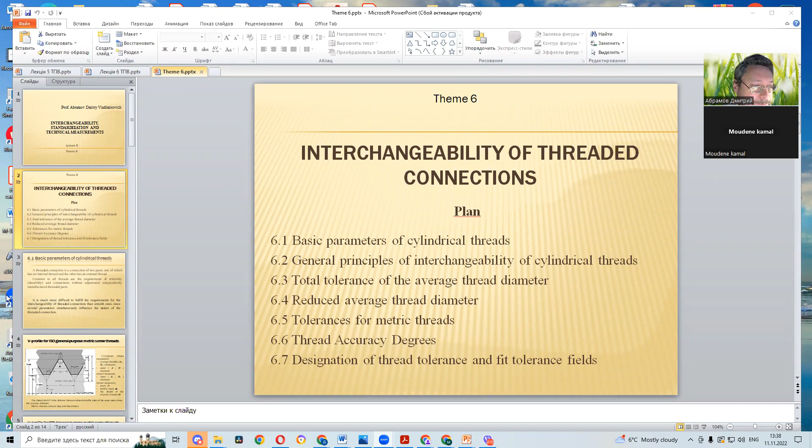Please tell me when you finished this slide. Yes, okay teacher, next slide. Yes, our 6.1 item, basic parameters of cylindrical threads.

A threaded connection is a connection of two parts, one of which has an internal thread and the other has an external thread. Please write down to your notes.

Common to all threads are the requirements of reliability and connection without adjustment of independently manufactured threaded parts. It is much more difficult to fulfill the requirements for the interchangeability of thread connections than smooth ones, since several parameters simultaneously influence the nature of the threaded connection.

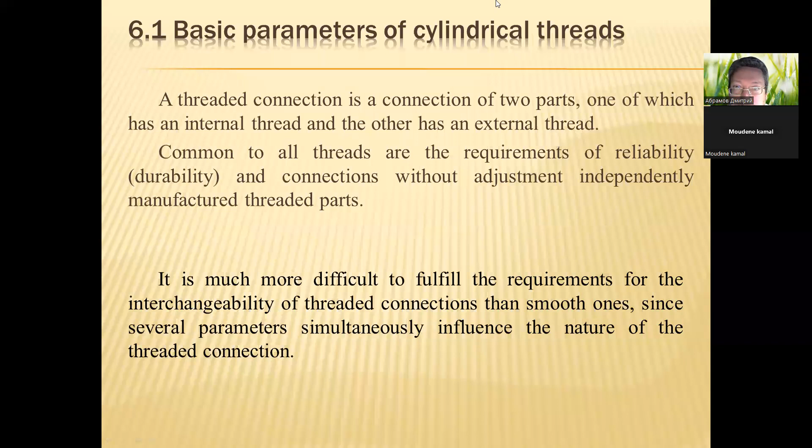Now you can see the V profile for ISO general purpose metric screw threads. Cylindrical thread parameters.

Average or middle diameter, D with suffix 2. This line is the average or middle diameter.

Outer diameter, D without suffix, small d or big D. Small d is used for the bolt and big D is used for the nut. Nut has the internal thread and bolt has the external thread. External thread is the bolt, internal thread is the nut. So outer diameter is D without suffix: big D or small d. Big D is used for the internal thread and small d is used for the external thread, for the bolt.

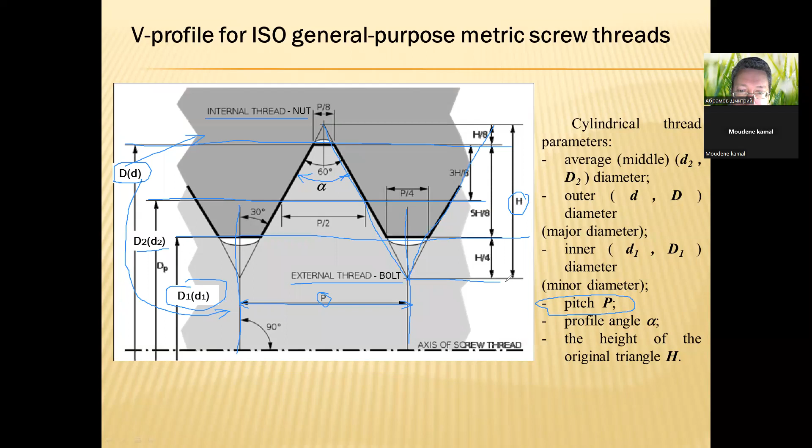That's all the parameters of the metric screw threads. Please write down to your notes this figure with diameters - outer, inner, and average or middle diameter - with the pitch and H, the height of the original triangle, and with the profile angle that is equal to 60 degrees.

Okay, the thread pitch P - previous slide please. The thread pitch P, this distance, these dimensions - the thread pitch P is the distance between adjacent profile sides of the same name along the average diameter or middle diameter.

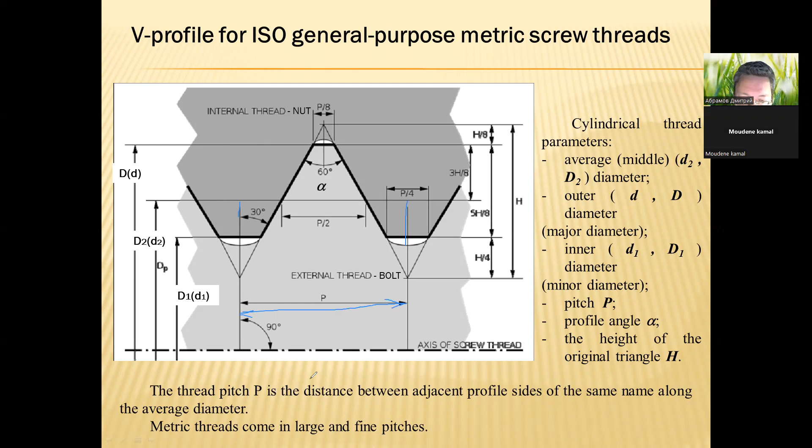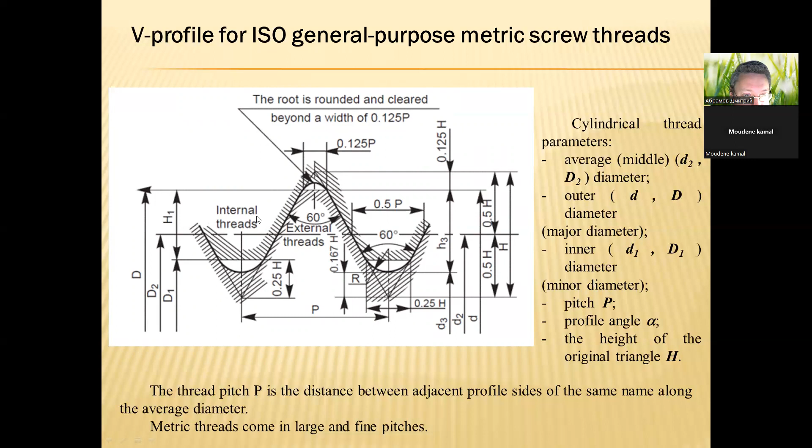Metric threads come in large and fine pitches. One more figure with metric thread.

Metric threads come in large and fine pitches. For a thread with a large pitch, there is a dependence: D is equal to 6P powered in 1.3. For threads with fine pitch, different pitches can correspond to the same outer diameter.

What we can see in this picture, in this figure? We can see the pitch diameter or middle diameter, we can see the pitch and the diameter, and the angle. So the angle is 60 degrees for metric threads.

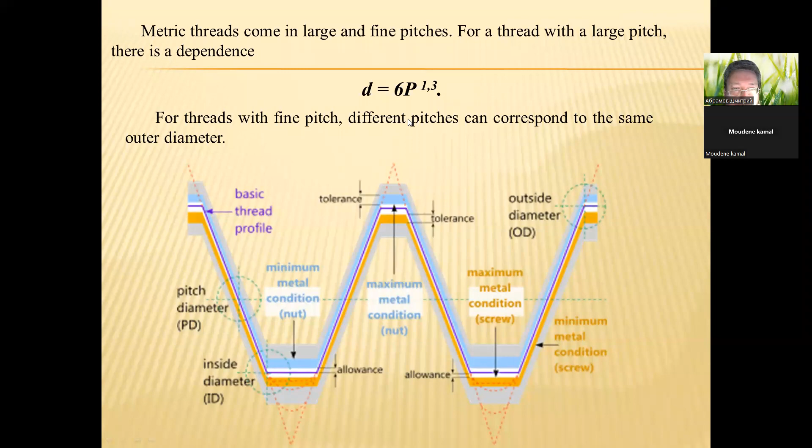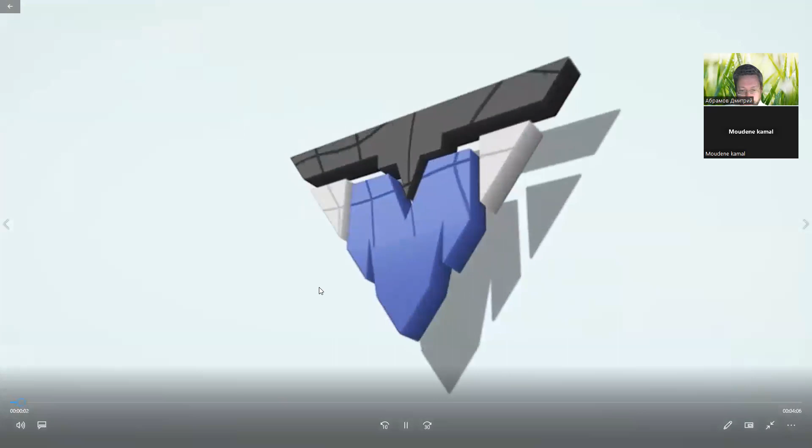Now I want to show you some videos with thread connections. It's thread anatomy. What types of thread we can use, we can see.

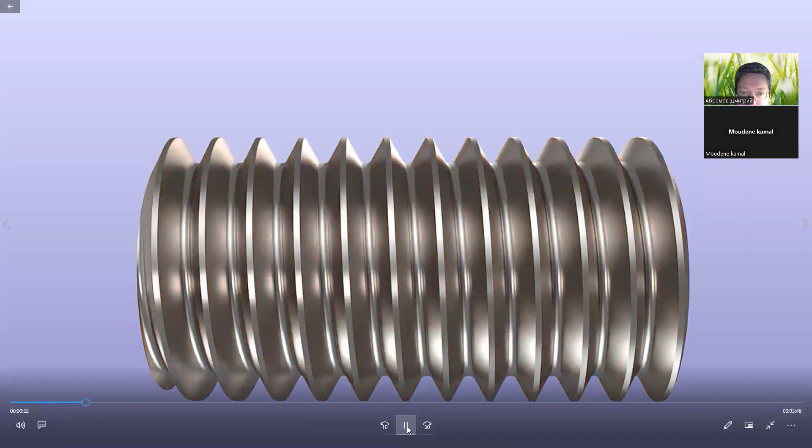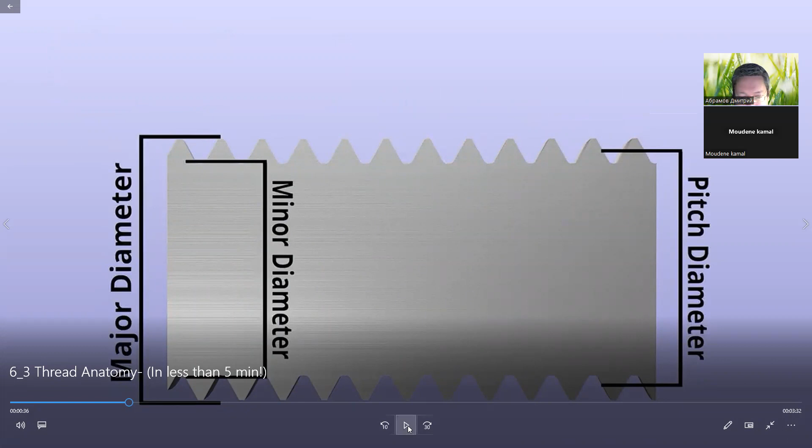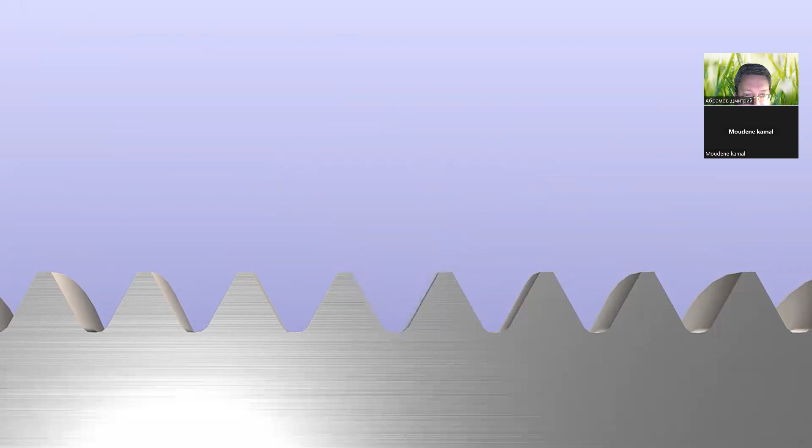We have major diameter or outer diameter, minor diameter or inner diameter, and pitch diameter or middle diameter of the thread. It's external thread of the bolt, and it's a pitch, thread angle, thread depth.

Types of thread. We can see 9 types of thread. Metric, it's the most popular type of thread, metric thread. Inch, Whitworth, Acme, modified square, buttress, sharp V, worm, and knuckle.

Metric thread. The ISO metric standard screw thread has a 60-degree pitch angle, with a flat crest and a rounded root. Uses pitch to define thread.

Example, M8x1.25 is equal 1.25 millimeters from root to root. It's a pitch of the thread. 1.25, it's from root to root. And this type of thread, general use for standard assemblies that need to be bolted together.

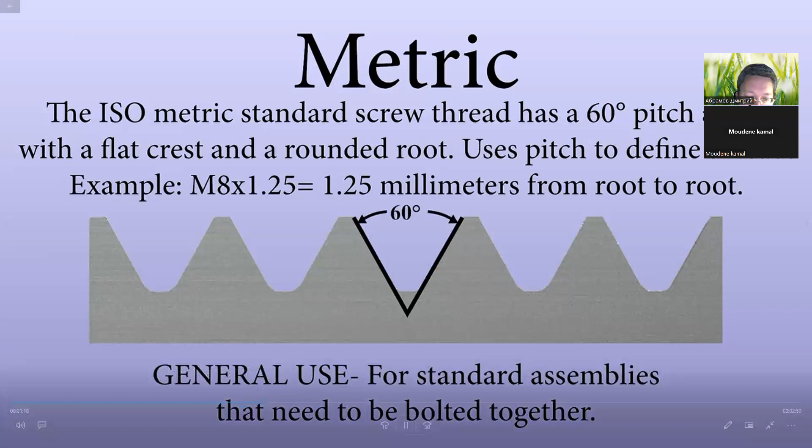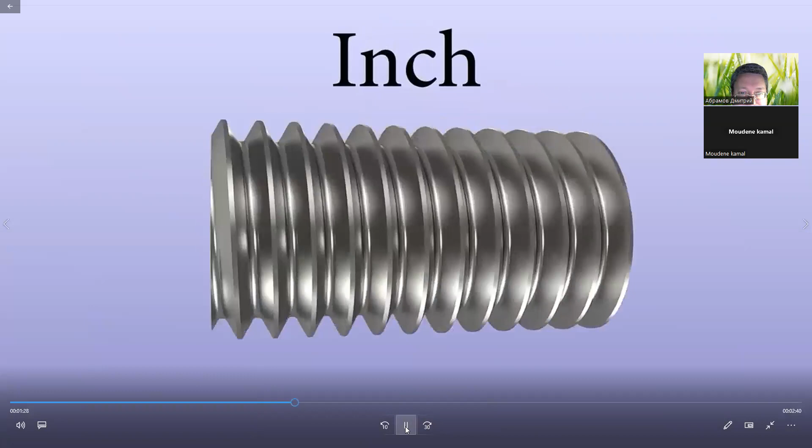Next type of thread, inch. Has a thread angle of 60 degrees with a flat crest and a rounded root.

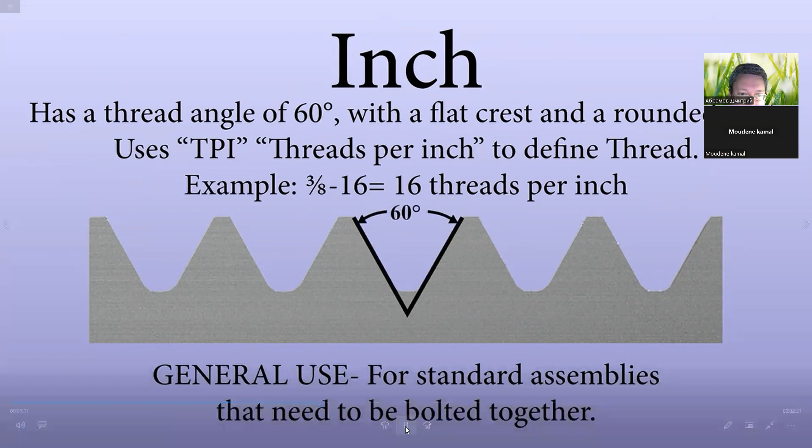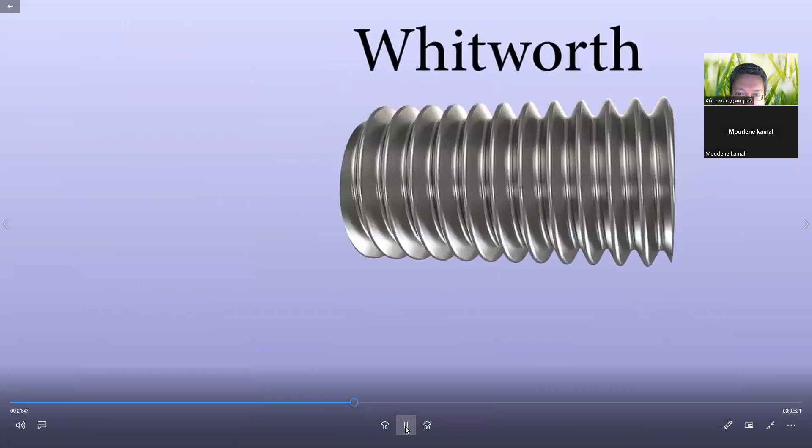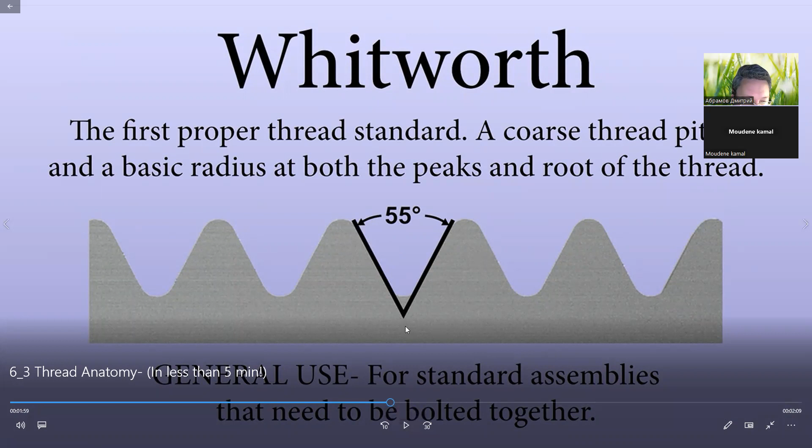Whitworth. The first proper thread standard, coarse thread pitch and basic radius at both the peaks and root of the thread. And what we can see, the angle, it's equal 55 degrees. And the general use for standard assemblies that need to be bolted together.

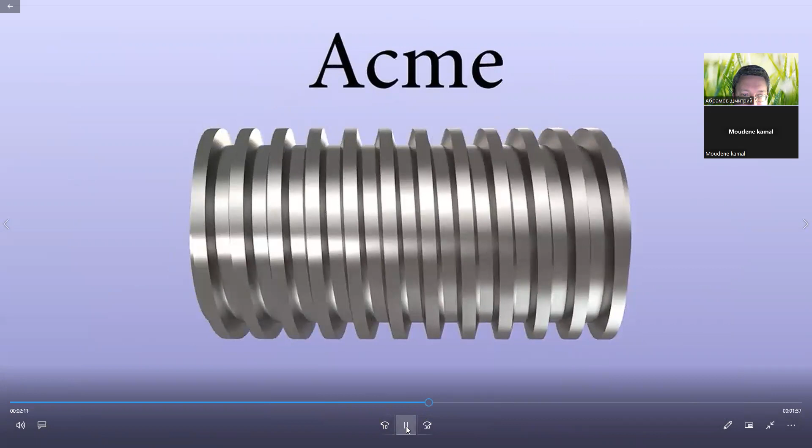Next type, Acme. Trapezoidal thread form with a flat crest and root. These threads are one of the strongest symmetric thread profiles. General use for controlled movements on machine tools, testing machines, jacks, aircraft flaps, and conveyors.

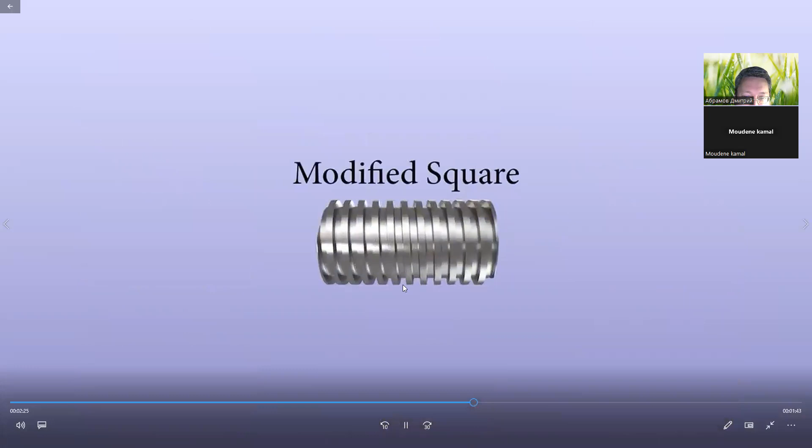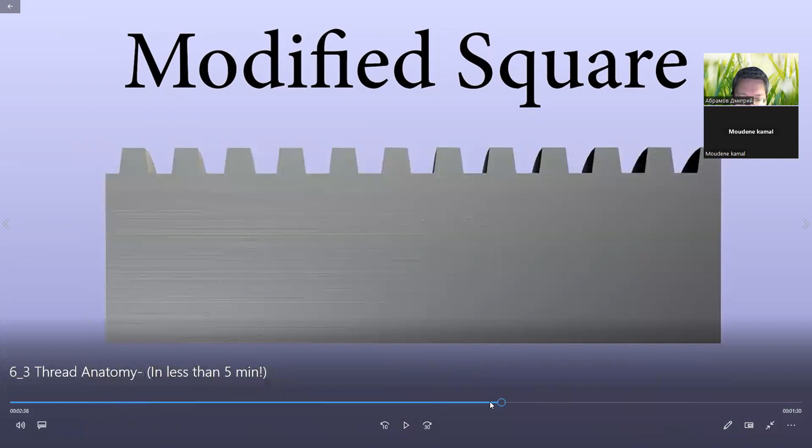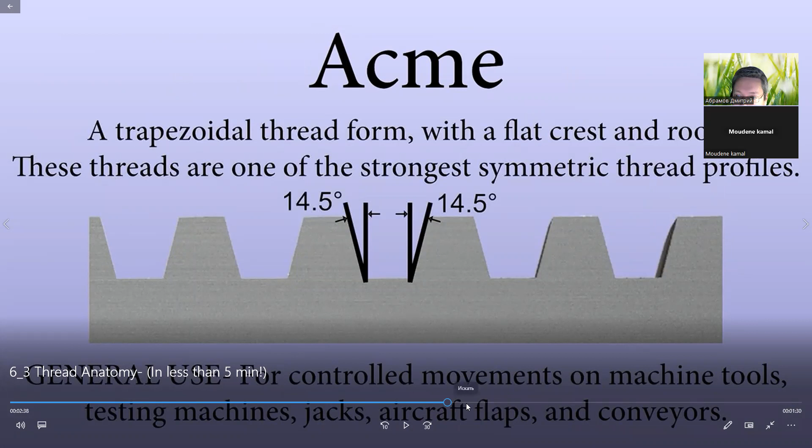Modified square. Similar to the Acme thread, the modified square thread has a trapezoidal profile, but with a much smaller pitch angle than an Acme thread. It's 5 degrees. In Acme thread, it's 14.5 degrees. So that is the difference between these two threads. Modified square has the angle of 5 degrees.

Where is this modified square used? General use: since the pitch angle is small, it has low friction and high transmission efficiency.

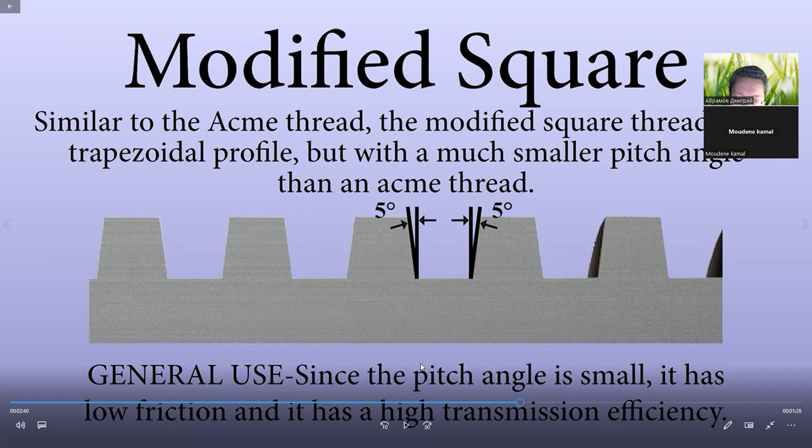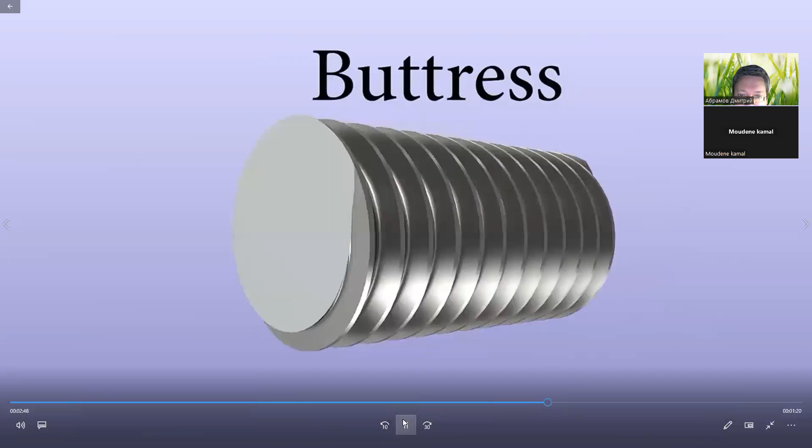Buttress. Threads with an asymmetrical pitch. All previous types of threads were symmetrical, having a symmetrical pitch. Now this type of thread has asymmetrical pitch. General use: high loads and heavy lifting, transmission threads in turning and milling machines.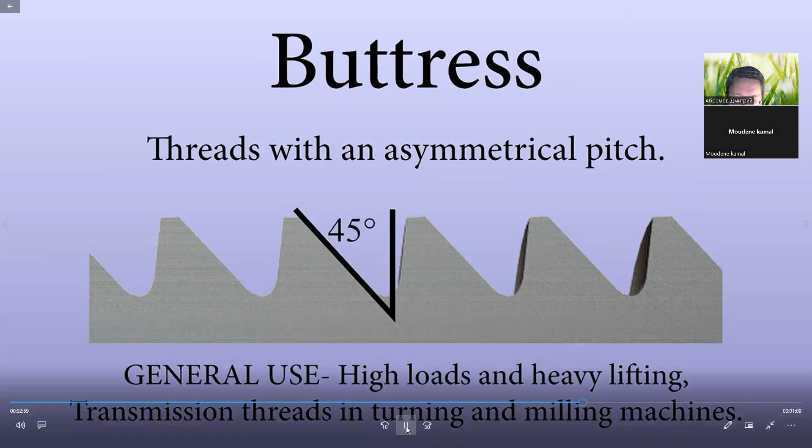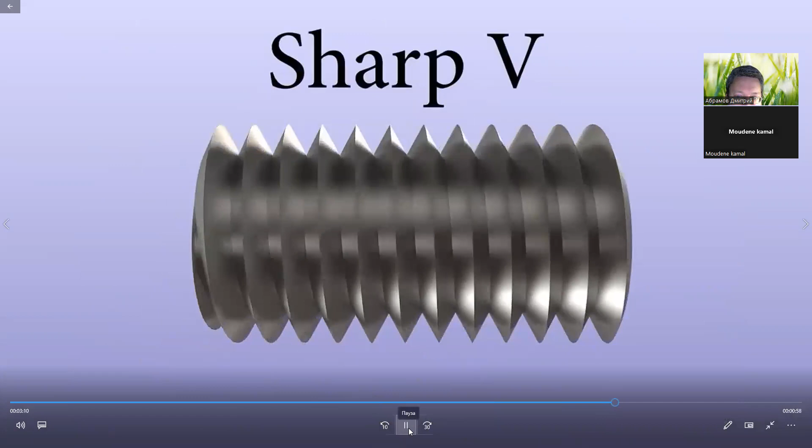Sharp V. Peaks and roots are sharp. This allows for the same cutting tools to be used for all pitches. General use: meant for locomotive work because it naturally forms a steam tight joint when machined correctly.

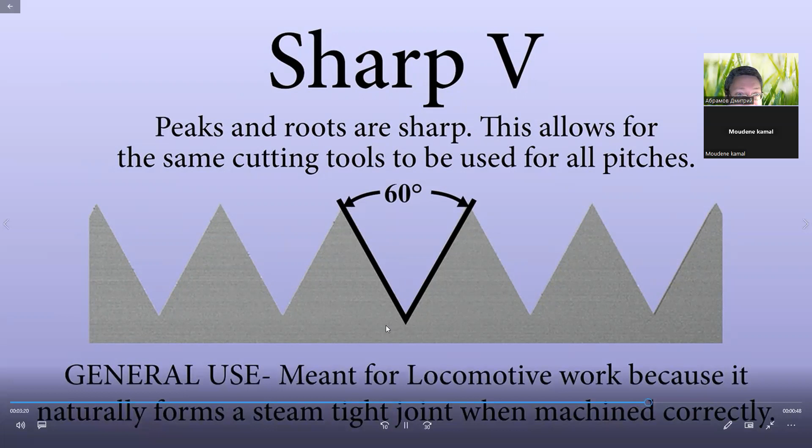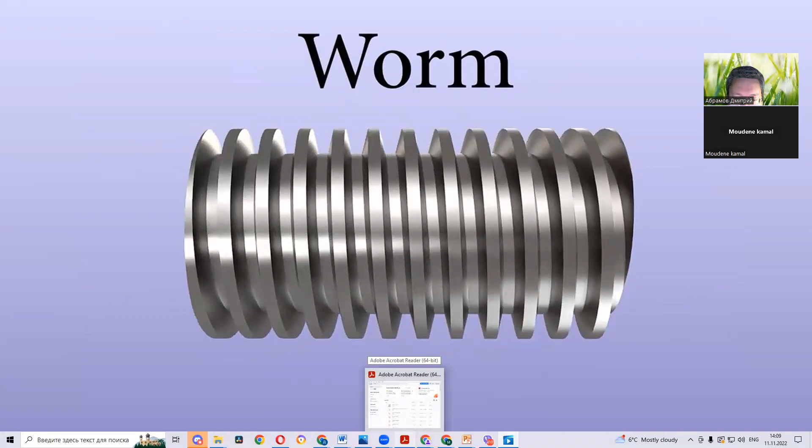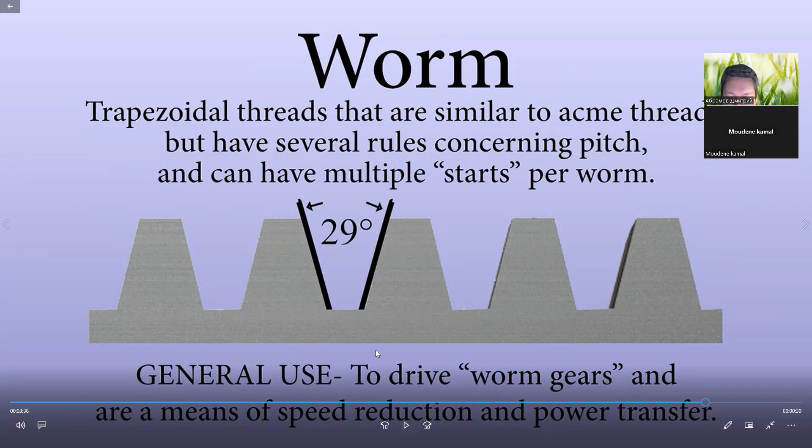Worm. Trapezoidal threads that are similar to Acme threads but have several rules concerning pitch and can have multiple starts per worm. The angle is equal 29 degrees. General use: to drive worm gears as a means of speed reduction and power transfer.

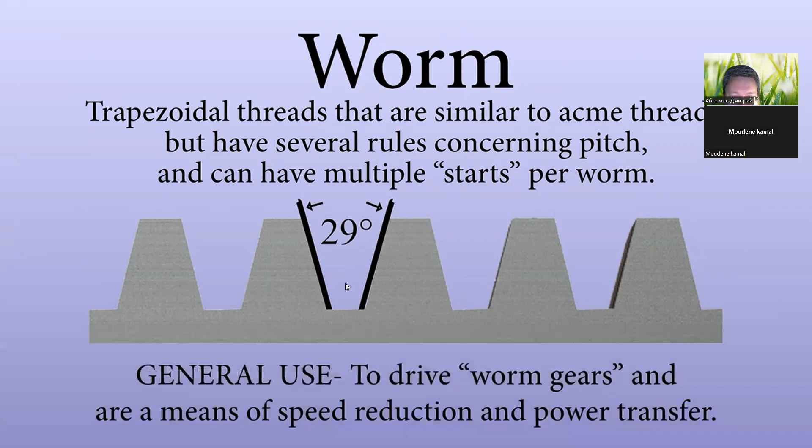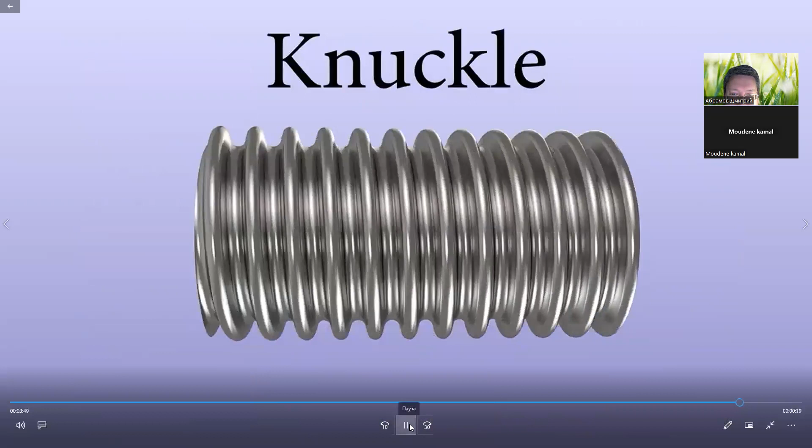And the last type of thread is knuckle. Consists of a highly rounded thread form. These threads are highly resistant to debris and wear since there are no sharp edges for anything to catch on. General use: desirable for high load operations where debris can be an issue, such as mining, locomotive, and industrial applications.

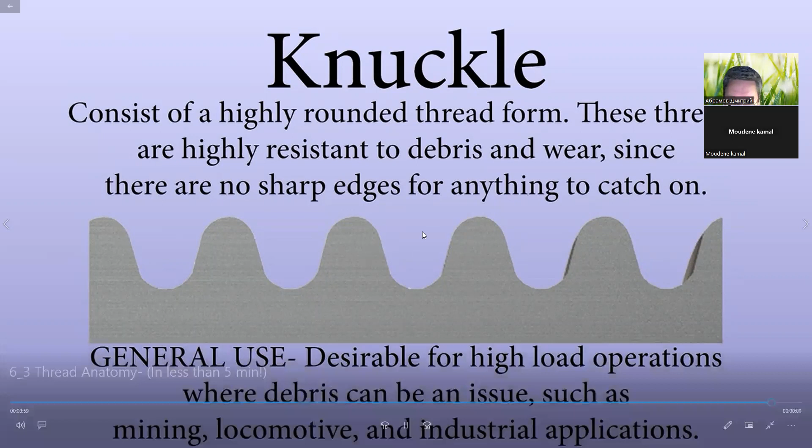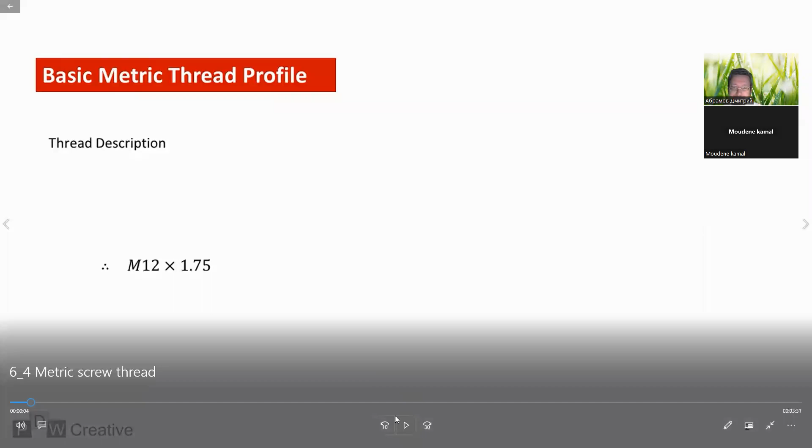Next video. Basic metric thread profile. It's a video about metric threads, the most popular thread in manufacturing.

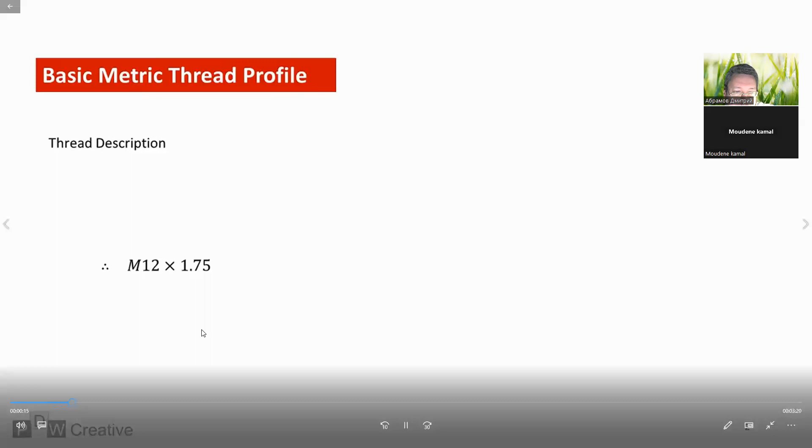Metric thread profiles are often written as shown. This is an example of a 12 mm thread, where M stands for metric, 12 describes the major diameter of the thread, and 1.75 is the pitch.

There are additional classifications sometimes written after the pitch, such as tolerance, but there is a lot to explain on this, so I'm going to go into that in another video.

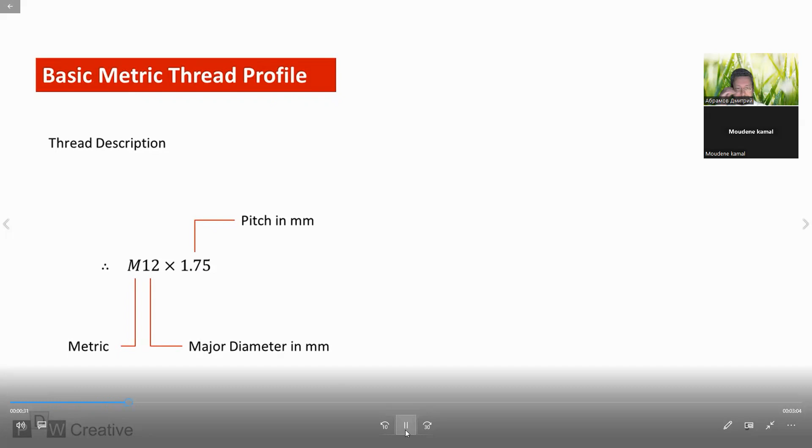The important part to know is that the major diameter refers to the largest diameter of the external thread, meaning the screw or bolt, and the pitch, P, is the distance between one tooth section focal point and the next corresponding point on the next tooth.

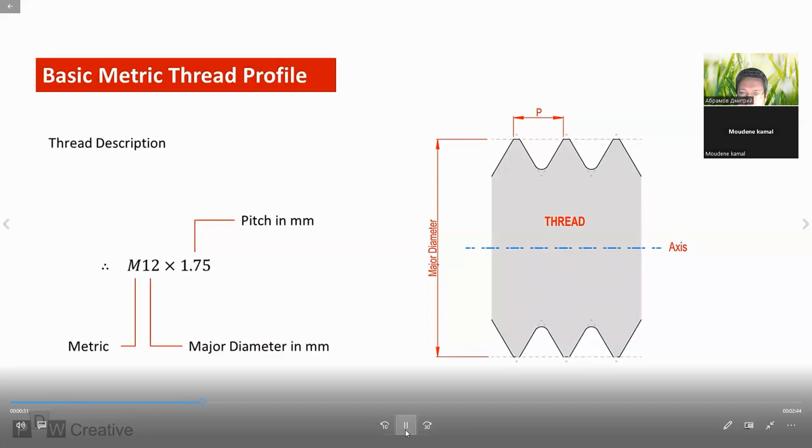International standards such as ASME B1.13M detail widely accepted thread diameter and pitch combinations. Here, I'm showing some of the most common coarse and fine type pitches for major thread diameters up to 36 millimeters.

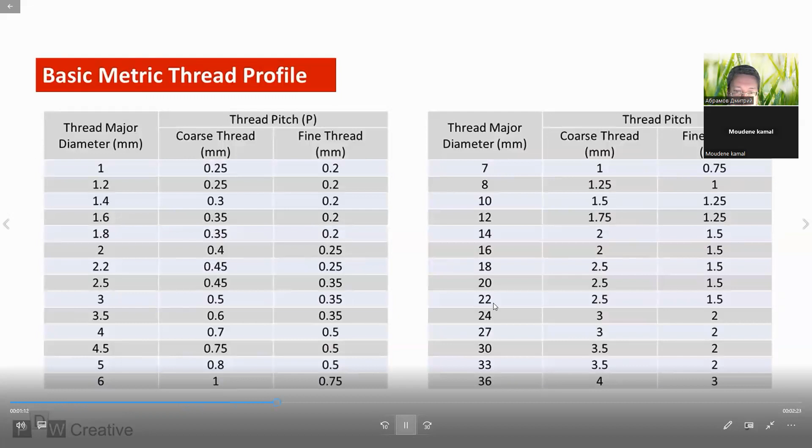The thread consists of an internal and external component. The internal part is the nut, and the external is the screw or bolt.

The major diameter or radius, for the benefit of this cross-section, is the largest thread diameter or radius. It is often also known as the crest of the thread. The pitch radius is the effective radius. The minor radius is the smallest radius and often describes the root of the thread.

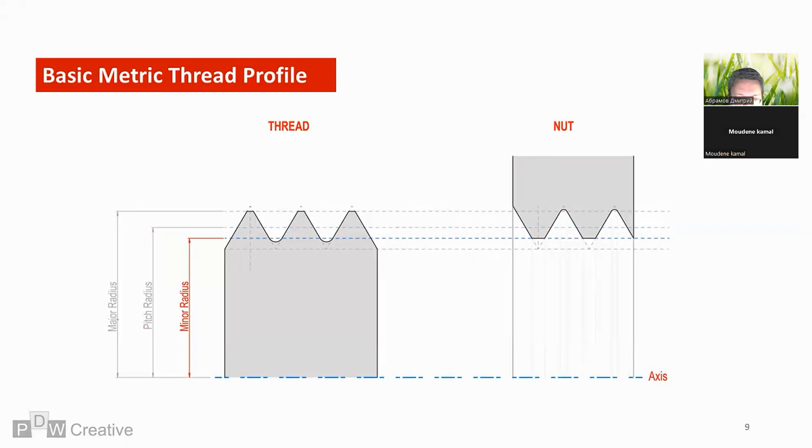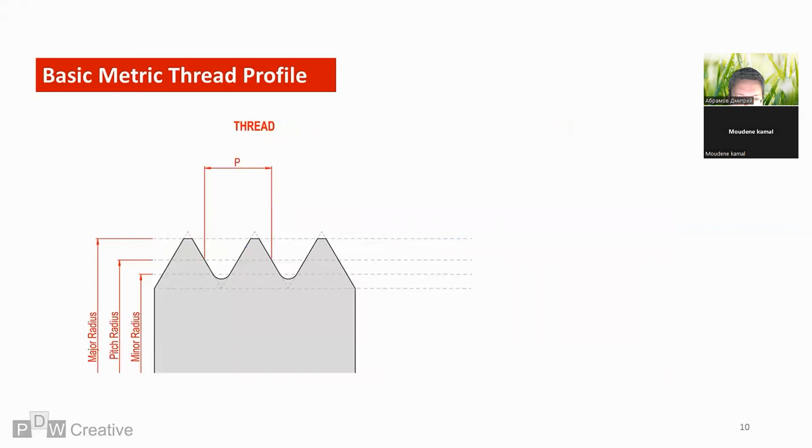The pitch, as explained before, is the distance between tooth profile sections, and the surrounding geometry for the thread can be worked out by knowing the pitch. The thickness of the tooth at the pitch radius is half of the pitch. The crest is P over 8, and the root is P over 4.

Metric thread teeth are set at 60 degrees regardless of the diameter. H is the height of the fundamental triangle, and this can be worked out by using P. So H equals square root of 3 over 2 times P.

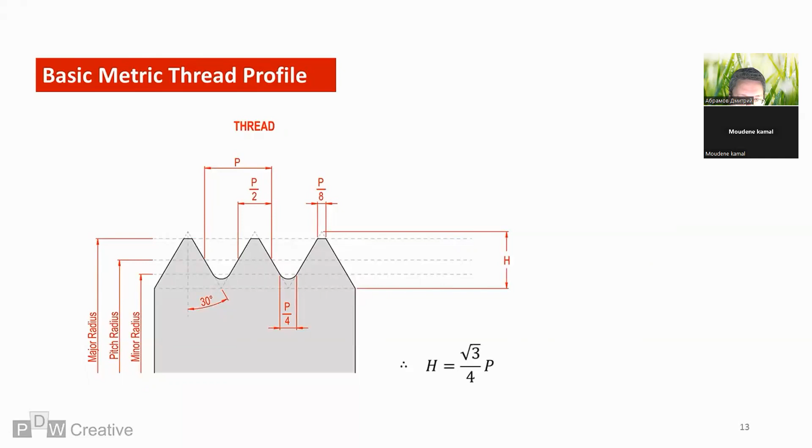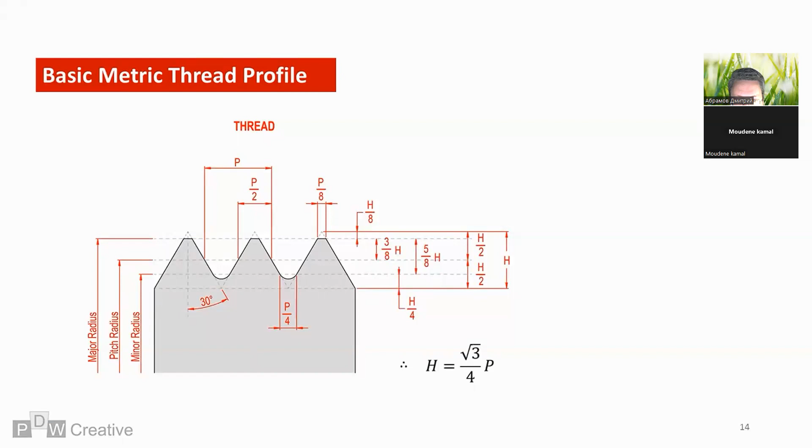Distances and relationships between major, minor, and pitch radius can be found from partitioning H. The crest to the peak of the triangle is H over 8. Root to base of the triangle is H over 4. The equations show the pitch radius is positioned at half of H.

If we overlay the nut, the major, minor, and pitch radii intersect the mating part. Both P and H are relevant. The crest and root of the nut are identical to the thread, and this is shown by P over 8 and P over 4.

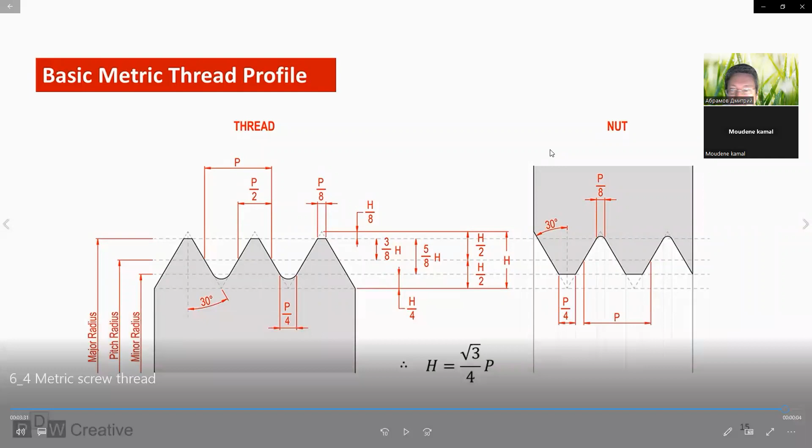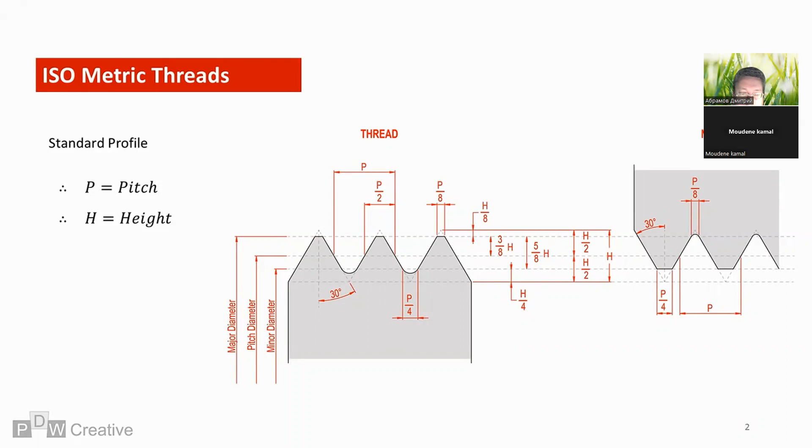Let's start with the thread description. General metric threads start with an M, denoting the thread is metric, followed by a number referring to the external thread major diameter. The last number references the pitch.

When tolerances are referenced, an extra designation sometimes appears after the pitch. In this example, I've added 5g and 6g. 5g refers to a negative tolerance deviation on the pitch diameter, and 6g is a further negative deviation tolerance on the major diameter. We say negative as the thread cannot be larger than the basic or standard profile.

Otherwise, it would interfere with the internal thread associated with the nut. So any tolerance is based on a reduction in size.

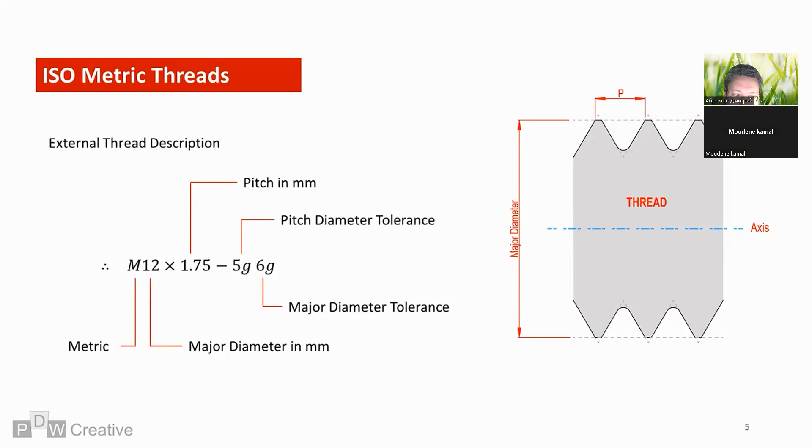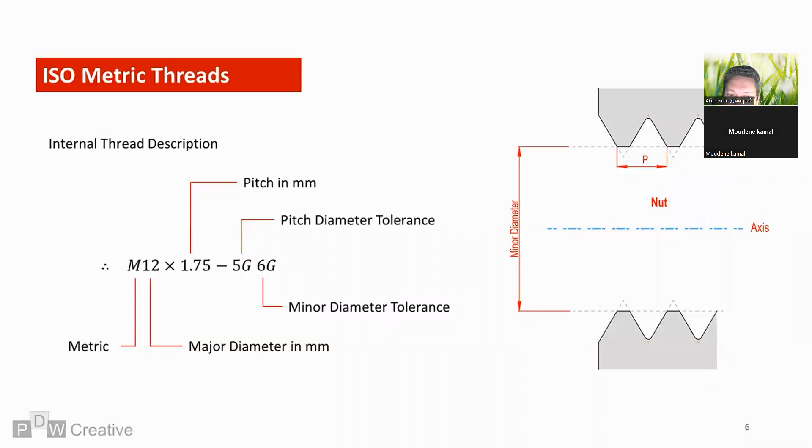The internal thread tolerance is accompanied by capital letters, and this means the deviation is positive. The nut internal thread cannot be smaller than the standard profile, so any tolerance must lead to an increase in size. The second letter and number combination for internal threads focuses on the minor diameter rather than the major diameter.

Two matching internal and external threads, in other words, the nut and screw thread, share a common major, minor, and pitch diameter.

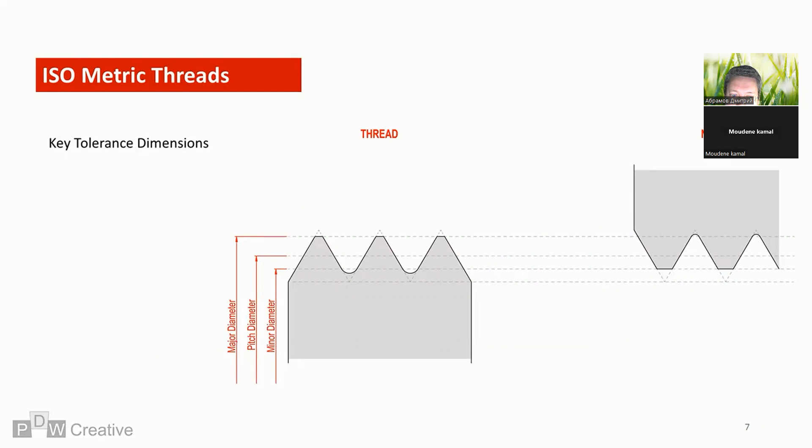For the screw thread, we will only focus on the major and pitch diameters. We'll call these d and d2 respectively. While for the nut, we will focus on minor and pitch diameters. Let's refer to these as capital D1 and D2.

In regards to the internal thread, deviation is above the zero line, and so is considered positive. Capital ES and EI mark the deviation. Deviation positions are categorized using letters. For the metric internal thread, we only use two positions. These are G and H.

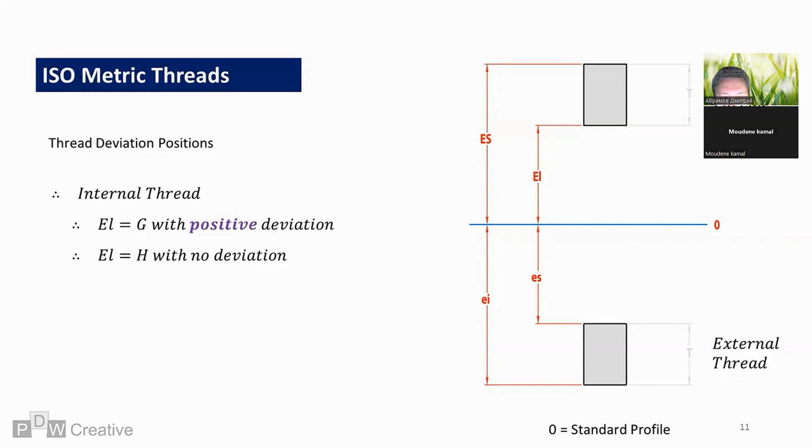The external threads deviate below the zero line, so are considered negative. Lowercase es and ei mark this deviation. Lowercase letters are also used to identify the negative deviation. There are many deviation positions for external threads, noted from positions A through to H.

Internal, external thread, or nut and screw tolerances are driven by the pitch.

Please use your pen and write down the fundamental deviations of internal thread and external thread. For internal thread, it's only big G and big H. For external thread, A, B, C, D, E, F, G, and H. So always between internal thread and external thread, we will have clearance.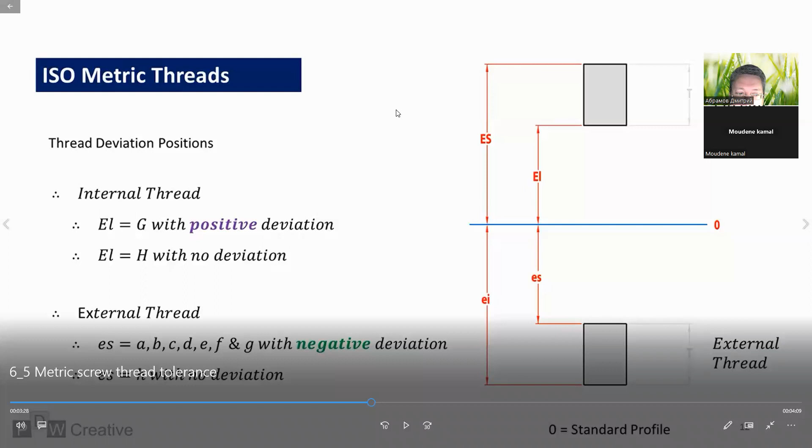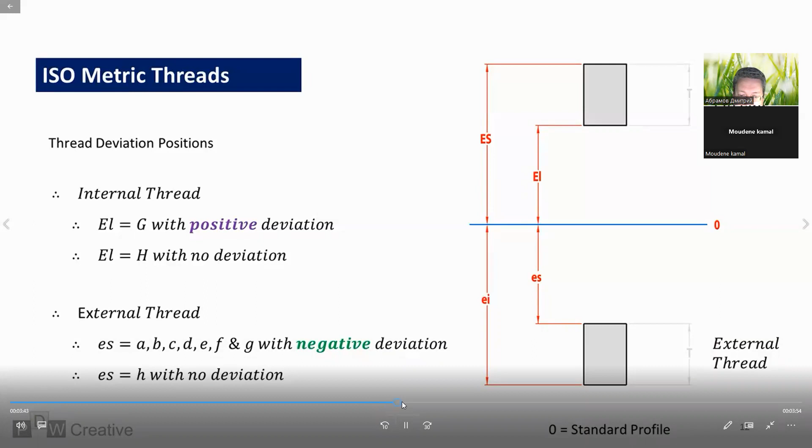Lowercase letters are also used to identify the negative deviation. It's noted that internal thread or nut and screw tolerances are driven by the pitch. As the pitch increases, more external thread deviation positions become available. Position G and H are available for all threads regardless of the pitch.

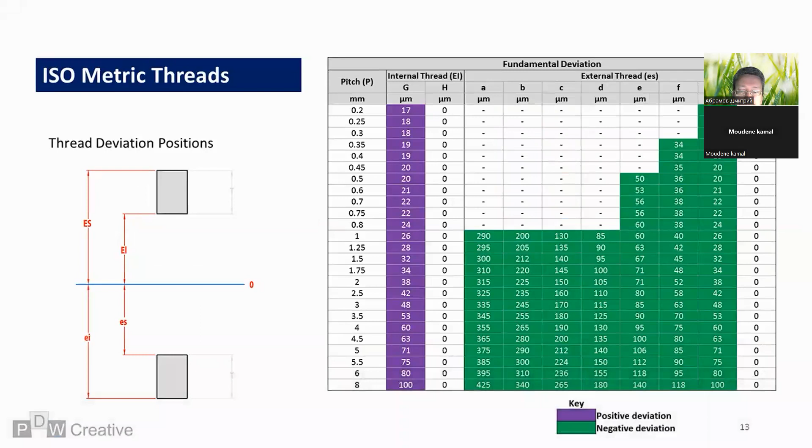Here is a diagram of the standard or basic thread profile in blue, with internal thread deviation and tolerance overlaid. EI marks the deviation for tolerance position G. The grey section marks the minor and pitch diameter tolerances applied after the position shift.

The only other deviation position available for internal threads is H. H offers zero deviation before tolerance begins, and so tolerancing starts at the basic standard profile.

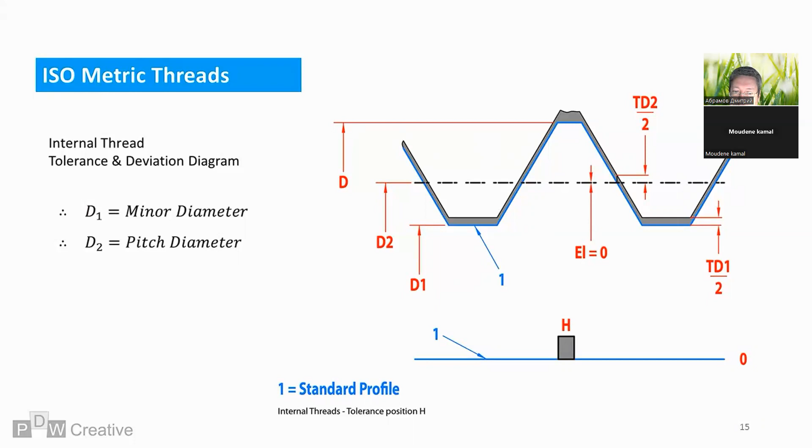The diagram for the external thread reverses these basic schemes. Let's look at these again. If we have H, the fundamental deviation of the tolerance field, we have the clearance between

H without clearance between zero line and fundamental deviation of the tolerance field. G with clearance.

Tolerancing starts at the basic standard profile. The diagram for the external thread reverses the deviation and tolerance direction. Position G offers the smallest deviation. Deviation increases at each position up until position A.

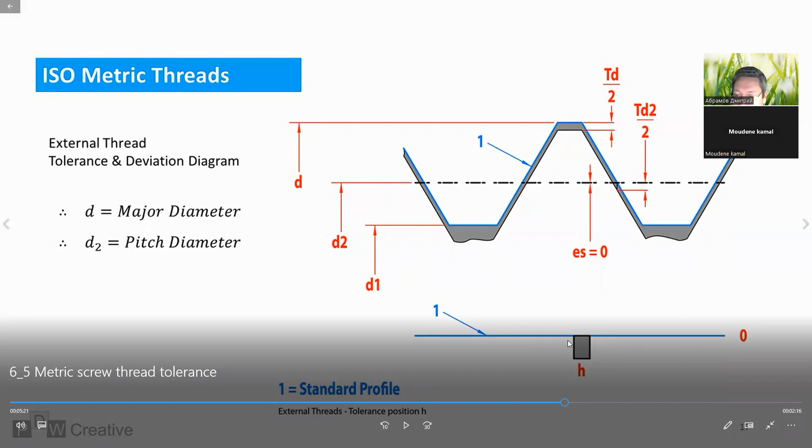The alternative external thread deviation position is H. If the fundamental deviation of the bolt is h, the distance between zero line and the tolerance field equals 0, without this distance. H again offers zero deviation. Tolerancing begins at 0.

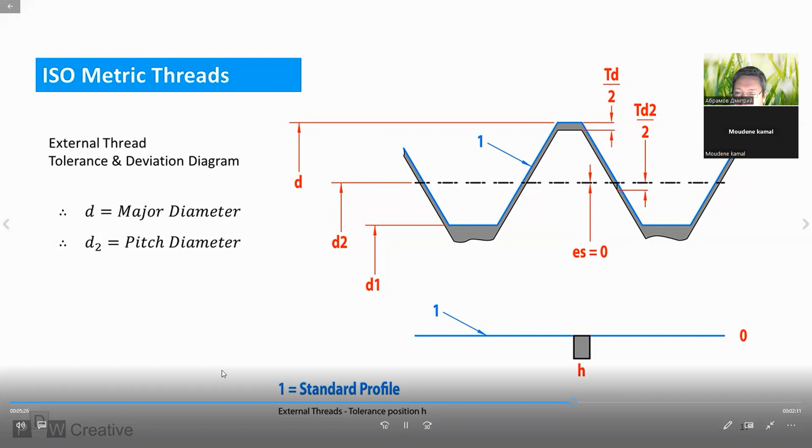Multiple tolerance options are available for each tolerancing diameter. These are known as thread tolerance grades. Smaller grade numbers offer the tightest tolerance. Larger tolerance grades may be selected due to cost or manufacturing difficulties.

Please write down to your notes these grades of tolerance fields. There are extensive charts available for internal thread tolerance and external thread tolerance: internal thread in the nut and external thread of the bolt.

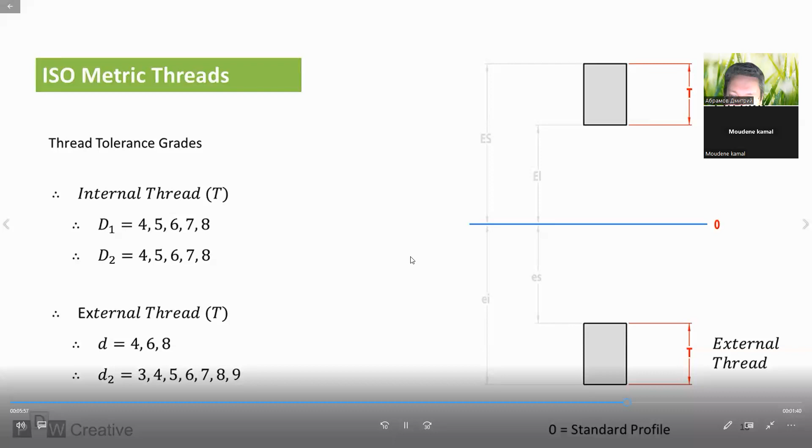Grades - I've opted not to show examples here because there are so many. Information on grades can be found in many engineering textbooks.

Metric thread tolerancing is also affected by thread engagement. Short, normal, and long thread engagements based on the pitch and major diameters require different tolerances.

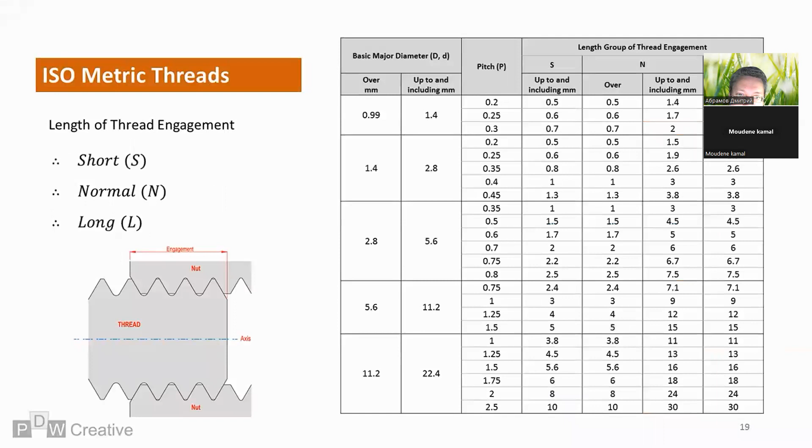If we see small g, small letters, we can say that it's the thread of the bolt. But if we see big G, for example, or 6H, big H, we can say that it's metric thread of the nut. Always small letters is for bolt, and big letters is for nut.

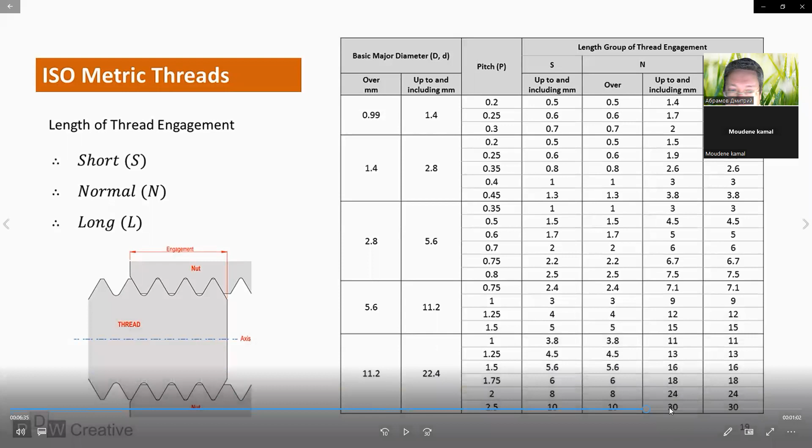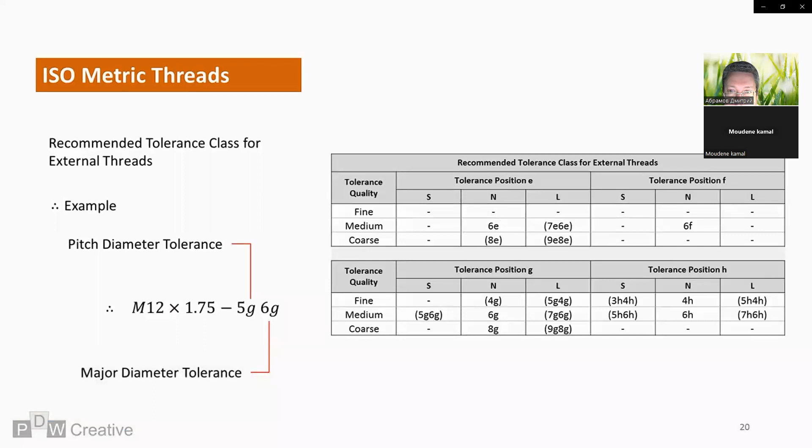Class depends on whether short, normal, and long thread engagement is selected. They also depend on whether fine, medium, or coarse pitches are selected. The external thread description tolerance is for the pitch and major diameters. Tolerance positions E, F, G, and H are preferred for external threads. Any combination shown in the tables here with only one letter and number offers the same class for both diameters.

Recommendations are a little more limited for internal threads, but this is because only G and H deviation positions are specified for this. Please write down to your notes this recommendation for the internal threads of the nuts. You can see it's a big letter, so it's internal thread of the nuts.

It's an example of thread - metric thread, pitch diameter 12, pitch equal 1.75, and pitch diameter tolerance and minor diameter tolerance is 5G, big G. In this table, we can see fundamental deviations that use big letters. Write down to your notes this table and this example of metric thread.

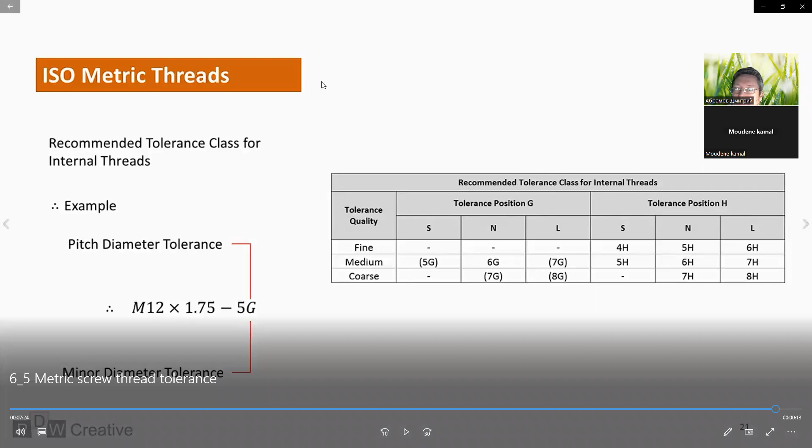So it was the last slide for today. We finished our lesson. We will continue next time in the next week.